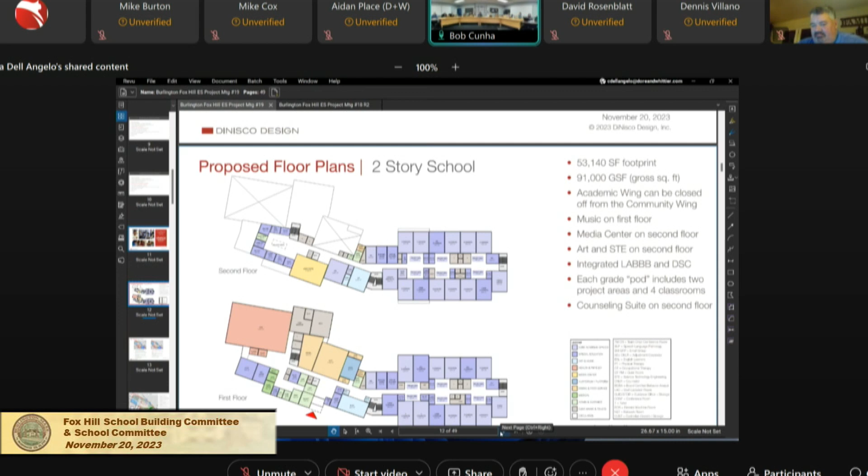So before us tonight is really just the general location of where we're going to put the new school. If you want to go—just, I don't know if you can zoom it. Maybe everyone can see it.

So our options are truly C, 3C, which is to the southeast of the existing building, or 3D, which is north of the existing building. The cost is slightly more with the building to the southeast of the existing building.

It does not provide for the preferred orientation of north and south for the classrooms, so they can obtain great light, daylighting, and views without the glare. Well, there'll be glare, but we can control it better with a north-south orientation.

The building will be approximately 65 feet from the vernal pool. We can go through the construction phasing in a minute. The reason it costs a little more is that we have about 7 feet of unsuitable soils that must be removed from within the building footprint, and there will be some retaining walls required due to the sloping site going from north to south.

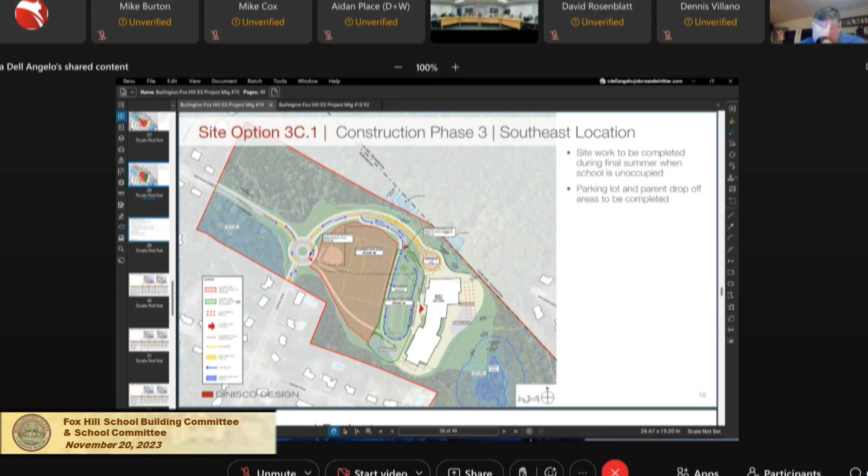And I think that's it. So maybe if you just go to the first slide that compared the two, and we can just open that up, Melissa. Yeah, 13 there.

Do you have any hands up online? Ed?

Hi, thank you. I have a question about the bus drop-off circulation loop there in 3D. That goes directly up the hill, and I'm wondering what you have planned to flatten that. I have trouble imagining the buses going up there in the wintertime with snow and ice on the road. To the site impact slide.

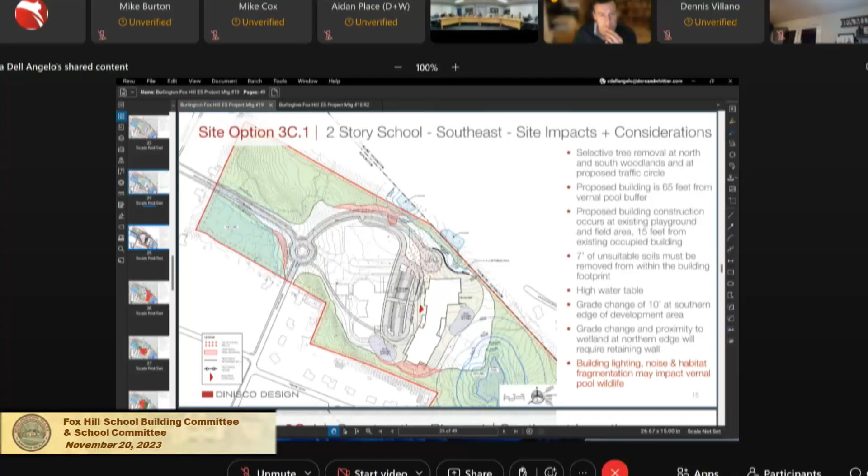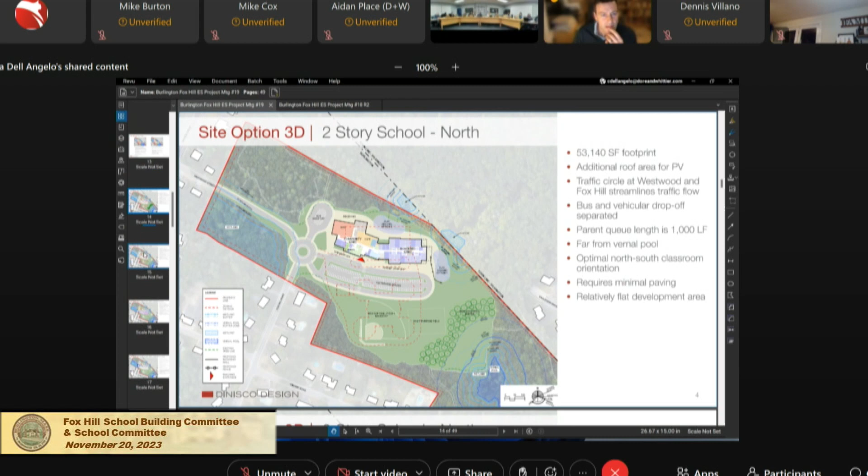Ed, you were referring to the one to the north, correct? That's correct, yep. Keep going.

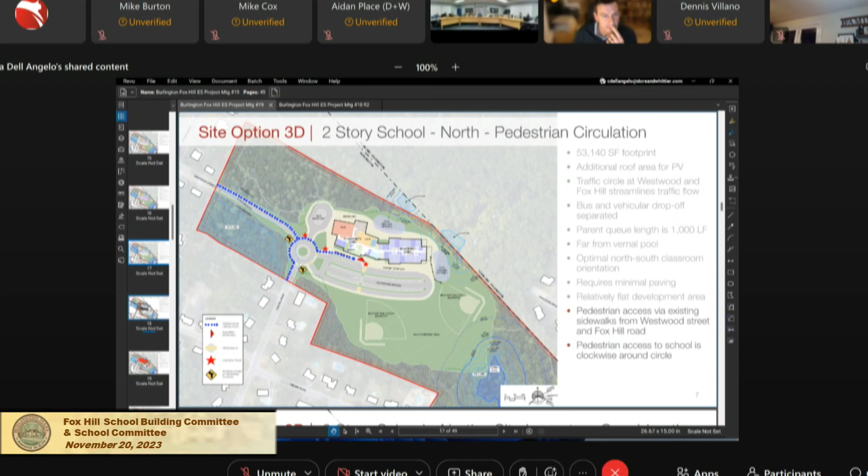So Vivian, would you like to respond to that? We know that that's sloped in that area, and that's why we need to take out the trees so that we would regrade that area. We may need to take out just a hair more, because you're right, Ed, that whole side of the site does need to be regraded. Where we can, we're going to try not to have walls. At this point, we don't anticipate that, because there's space to grade it out.

I can't see that. Okay, Ed, could you hear that? I'm sorry, I can hear nothing but murmurs. You're hard to hear, Vivian. Can you hear me now? Yes, oh okay, a little better.

Okay, so we are removing enough trees, so the red hatch marks are where we're proposing tree removal. We may need to remove just a hair more, but that area would be regraded so that there would be no more than the 2% slope that's needed, because we also need kids to be able to get off the buses and make that whole area accessible. So when we push the dirt away, we can do a 2-to-1 slope, and that means there's going to be a slope against the tree line, but we can grade the actual bus area out.

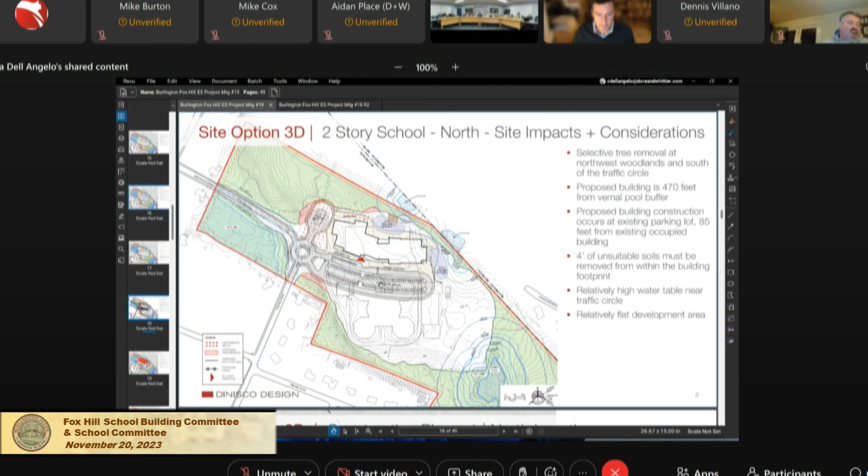I think the answer is yes, that whole area, yes, that's right. Are you saying on this option, Ed, will we be grading fields? That would be down there. Yeah, we would be grading. There is some high water table, so we would have all of the appropriate drainage layers under the field so they could be used more frequently or remain in better condition. So that whole area would be regraded.

Thank you. No other hands. All right, while people are thinking.

The only other thing is that as part of the conversation this evening, we have identified that both options have sufficient space for ground source heat pumps or geothermal. So if anyone was wondering what all those little red dots were, it was just letting you know that we could fit the well field if ground source heat pumps was the desired energy source.

Ms. Monaco? I'm under the impression that most, at least from the last meeting, that most people are in favor of the north part of the site. I'm not, but I just want to make the points about why I think the southern spot might be better, just really to get them on the record.

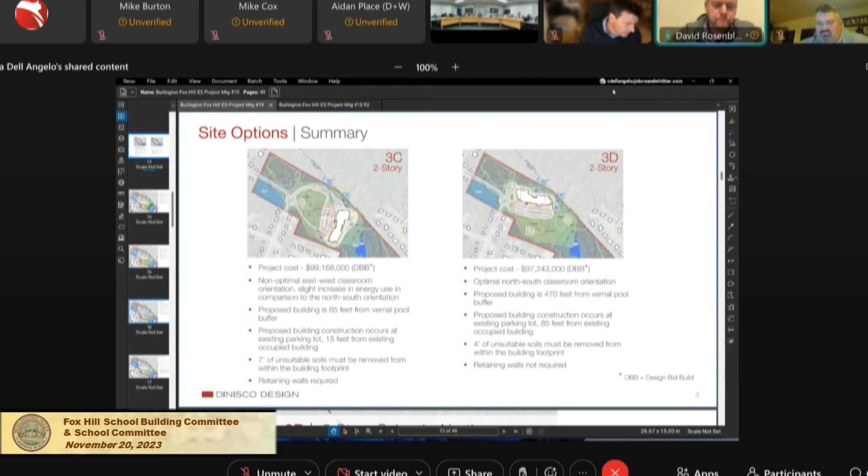Thank you. Do we need 2 votes, or there's 4 options? If we could include or amend the language in the vote to include the 2-story option to make sure that's captured in the process. All right, do you want to just amend that it's the 2-story option on the northern site, 3D? Yes. Okay. If it needs a second, I'll second the amendment. All right, we're all set in here.

All right, Mrs. Bond. Flipping a coin still. Oh, okay. Sorry.

Roll call vote: Mrs. Monaco, no. Ms. Simon, aye. Mr. Brooks, aye. Dr. Conti... Donna, when we spoke with the safety folks, did they express a preference? They were pretty neutral, they said they could work with both. They didn't have concern with the traffic circle, but since it's preliminary, they wanted to make sure their vehicles could enter the site and have access around the building. So there wasn't a strong preference? Okay. Continuing the vote: aye, yes. Mr. Cunha, yes. Mr. Sagarino, yes. Mr. Denizio, yes. Mr. Rosenblatt, yes. Mr. Villano, yes. Mrs. Priest, aye, and I vote yes. So it's 11-1-0.

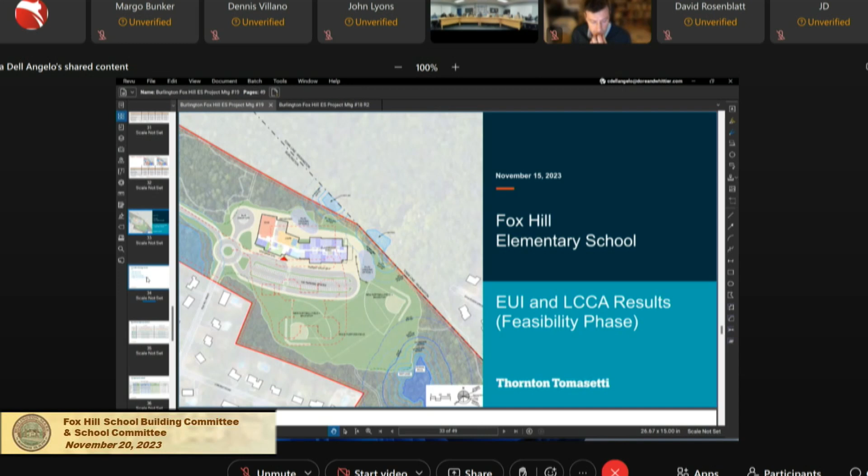So I think the last item we wanted to talk about was the opportunity to introduce ground source heat pumps, which you'll see as GSHP, or also known as geothermal. A lot of people refer to them as geothermal. So we gave an update last time on the sustainability working group meeting, and we just wanted to share with you again that we believe that with the new code requirements and the interest in the community to achieve a very high performing building, that we're able to do that. If you go to the next slide.

What we did is we looked at various options both for the plant itself, the component that produces the energy, as well as the distribution, which is the equipment that brings the heat and cooling throughout the building. So we looked at everything from gas boilers with a variable air volume distribution, an all-electric VRF system, variable refrigerant flow -- it just doesn't sound right, it never sounds right -- an all-electric air source heat pump system utilizing a fan coil unit, and then multiple options for ground source heat pumps, anywhere from active chilled beams, fan coil units, a displacement system, and even incorporating the VRF as a distribution component utilizing the ground for the energy.

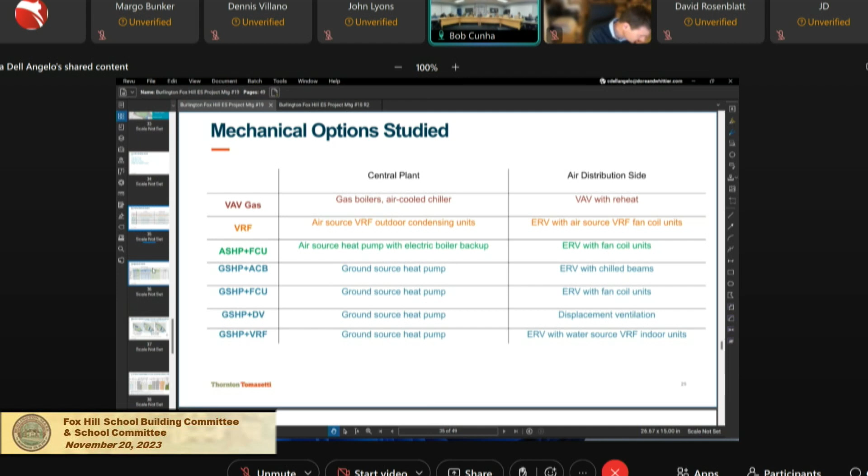So with that, when we did the energy models and the life cycle cost analysis, we took into consideration the schedule that was provided to us, recognizing there's a lot of anticipated use for the building, and we feel very confident that the projected use would probably come to fruition, and we have even in some instances opportunities to even exceed that should the building be more popular than we anticipate.

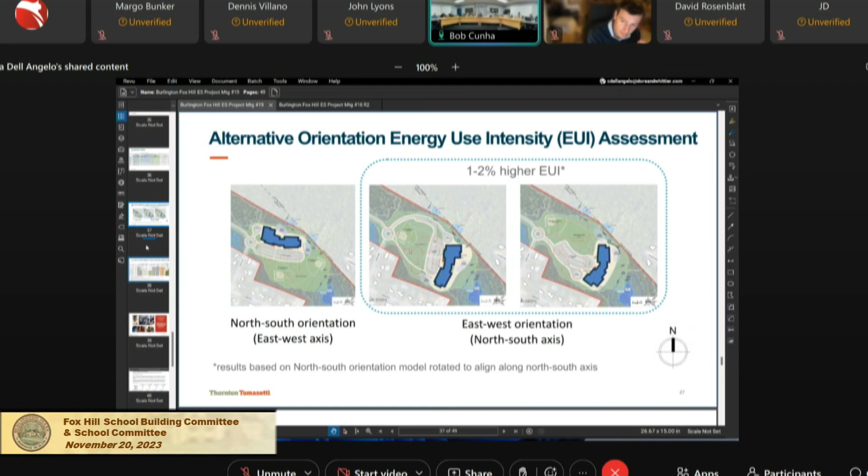We also looked at whether the placement or orientation of the building really matters when you're talking about energy use. It's 1 to 2% higher with the east-west orientation, again, because you don't benefit from the solar as much as you would from the north-south, but we'll just keep going.

So this is a life cycle cost analysis, and I believe we spent a little bit of time on this last week. Our goal tonight is to hopefully obtain a vote to support ground source heat pumps. That was a result of the sustainability working group, which occurred the day after we met last week. Was that only a week ago? Wow.

So after going through the life cycle cost analysis that we shared with you last week, the sustainability working group felt that it would really be beneficial to the project and the community if we go with a ground source heat pump system or plant to deliver energy into the building. You'll see that from an energy use perspective, it generates the least amount of energy use, and you'll also see that you receive the most incentives through Mass Save and also through the Inflation Reduction Act tax credits.

Recognizing the annual energy is pretty consistent through all of the options. Looking at the amount of replacement, a VRF system requires more replacement than an air source heat pump system compared to a ground source heat pump system. When you walk through all of the replacements required over a 50-year lifespan, it actually costs less utilizing any of the ground source heat pump options over air source, VRF, and a gas boiler.

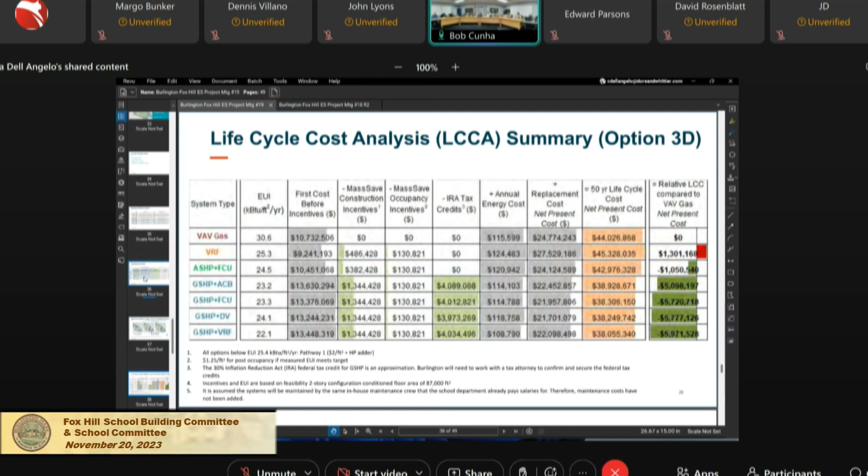Madam Chair, we can have a discussion. Should we just second the motion? Second. So I'll second the motion for discussion purposes, and then we can do it. That's okay? Yep, this is perfect, thank you.

So the base number, you'll see where it says total construction with base VAV and gas boilers. And then we added the ground source heat pump with the fan coil units. You'll come to a total construction cost, and let's go to 3D DBB, or design bid build, for $76.9 million. And then you would see the incentive credit that would come back to you, so the construction cost would be 71.

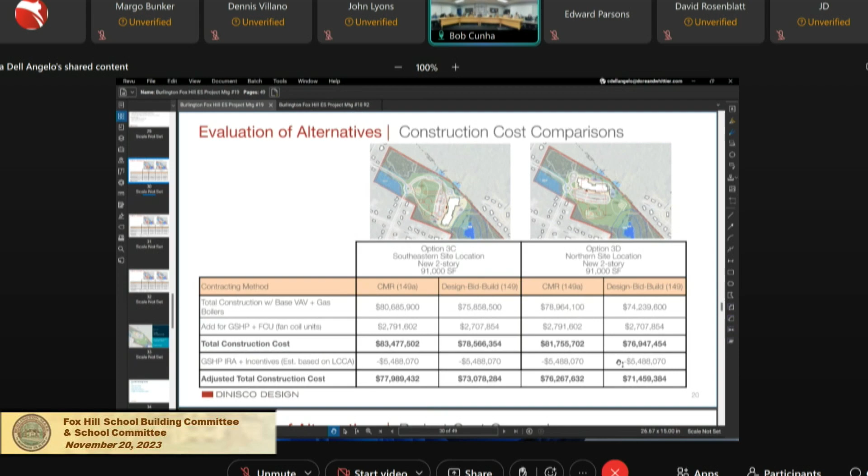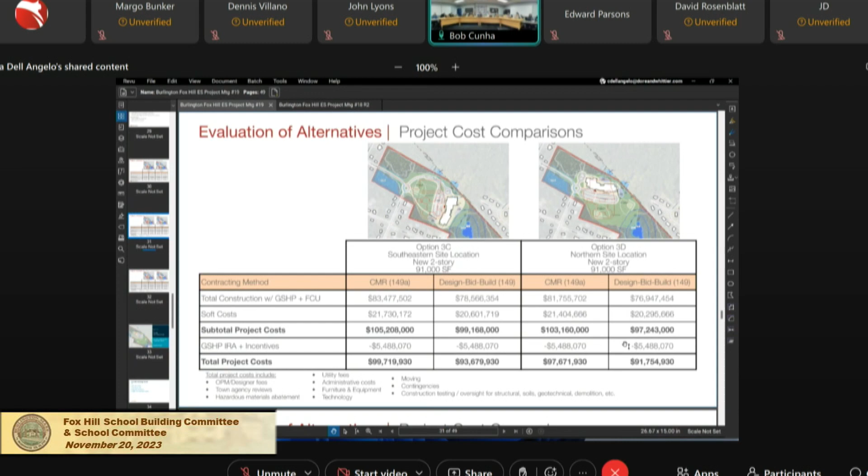And the numbers that Ways and Means ran were off of the adjusted cost, if you go to the next slide. This is the numbers that they used. They used the 97, but then you took the credits, right? The credits and rebates, so that was based on the 91.7. All right, thank you for clarifying that.